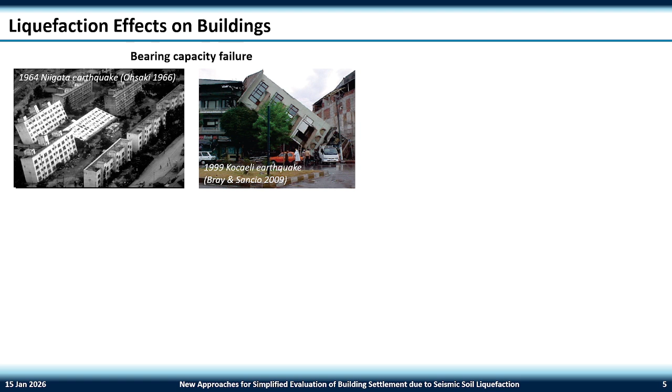So we'll look at case history observations, and liquefaction is a phenomenon that I'm sure many of you know causes soils to lose strength and stiffness, and so that can result in a wide range of effects on buildings. In the most extreme case, and probably the ones that make the headlines, are the bearing capacity failures, where we have the famous Kawagishi-cho apartment buildings from the Niigata earthquake on the left, and then some more examples that we've seen in Turkey, for example, in the Kocaeli earthquake.

For lightweight buildings, residential buildings as well, often this manifests in the form of tilts and settlements, and so Christchurch had several examples of buildings that had a few degrees of tilt and several tens of centimeters of settlement. In some cases, if we have buildings on piled foundations, you might often get cases where you have movements of the ground relative to the building. This is an example from the Kaikoura earthquake. Not really a case we'll look at today, but I thought I'd put it in here for completeness.

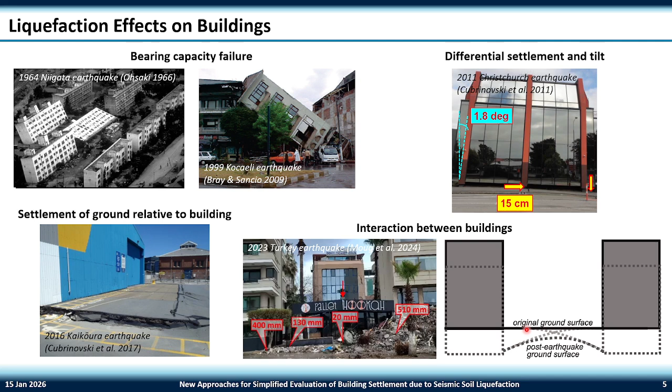And then more recently, from the 2023 earthquakes in Turkey, there have been some interesting studies looking at interaction effects between buildings. Here is an example of what looks like a hookah bar that sits between two larger and heavier buildings, and you can see the settlement of those two buildings is causing this kind of hogging ground motion, and that's controlling the response there as well. And so this is some interesting work that's also coming out of some of the recent earthquakes.

In terms of just focusing on bearing capacity, well, we know why that's happening. We know that liquefaction causes a decrease in stiffness and strength. If we visualize what's happening in the soils during liquefaction, it's illustrated with this diagram, where you can see the individual grain particles are actually not in contact with each other. And so there's not really much load transfer mechanism, which can lead to a loss of stability.

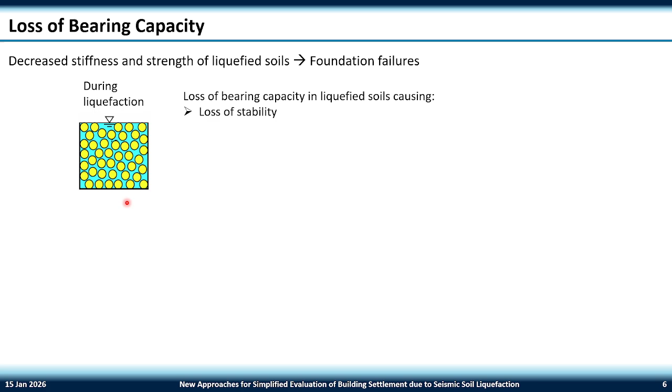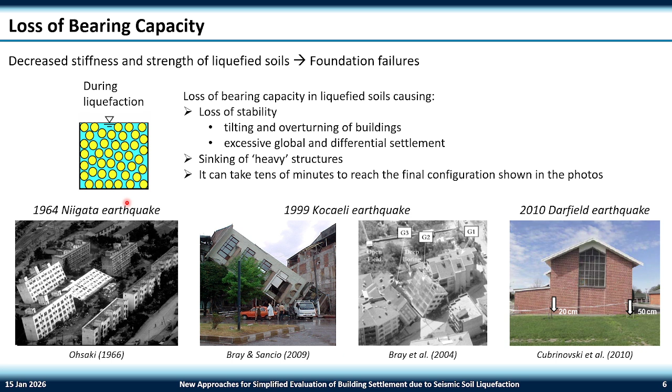For heavy structures, this comes in the form of tilting and overturning, and that's some of the pictures that we saw in the last slide. And then for lightweight structures, you might see it manifest in the form of excessive global and differential settlements. Just note here that these configurations in these images can take tens of minutes to reach. It's not going to happen straight away during the earthquake, but often manifests in this form a few minutes or sometimes even tens of minutes after the earthquake.

We also find that in cases where there's ejecta manifestation, these effects tend to be exacerbated. Ejecta manifestation is the case where liquefied soil has made its way up to the ground surface through cracks and fissures that are formed. So it's a hydraulic process of liquefied soil. Often we find that these are concentrated around the edges of buildings and footings. You can see some examples here of ejecta concentrated around these edges, and these are evidence of settlements due to soil loss as well.

You could imagine that once the soil has left a void in the ground, that void must be filled by the soil around it, and so that leads to additional mechanisms of settlement. And this is exacerbated for shallow liquefaction cases. This is an interesting consideration that you might want to include in addition to our traditional volumetric and shear-induced SSI effects as well.

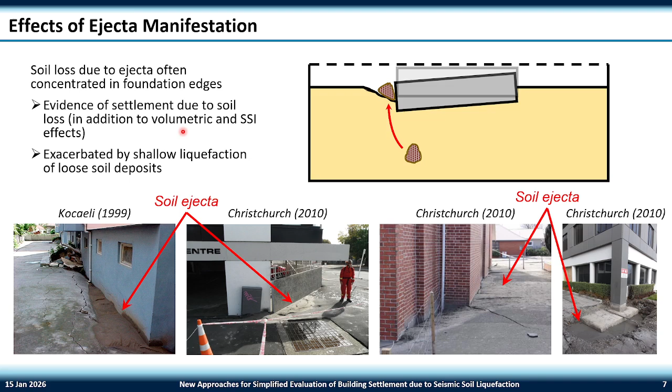Just to really drive home the point of shallow liquefaction, here's a case study of a building. This is the CTUC building from Christchurch. This was a building that's quite well studied, that liquefied. Below the building is a schematic of a cross-section, and you can see two CPTs there, one on the left-hand side of the building and the other on the right. They show profiles of the soil behavior type index, I sub C, plotting to the left of this line, and the corrected cone tip resistance, the QT, plotted to the right of that line. The shaded regions indicate soils that, according to existing simplified procedures, had liquefied during the earthquake.

And you can see on the right-hand side, that zone is really quite deep, right? We're seeing liquefaction occurring at about 10 meters or greater depth. But on the left-hand side, though the cumulative thickness of liquefied soil is equivalent, if we sum up those thicknesses, it's probably similar, it's much shallower, at about 2.5 meters depth. Shallow liquefaction, of course, tends to increase potential for ejecta, and in this case, we saw sand ejecta near the left-hand side of this cross-section here.

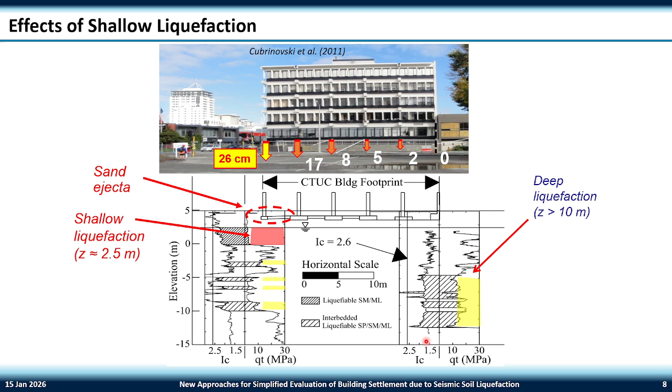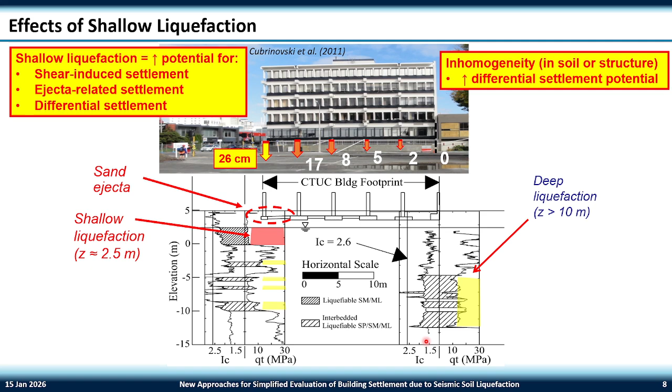And so this resulted in these differential movements that you're seeing here, right? You saw in the order of 25 to 26 centimeters of settlement on the left-hand side of that image versus much less on the right-hand side. The key takeaways here are that shallow liquefaction means increased potential for shear-induced settlement, for ejecta-related settlement, and differential settlement. And to drive home the point of differential settlement, non-uniformity in the soil or structure also tends to increase these differential settlement potentials.

This is a nice video to illustrate what I'm referring to with some of these features. This is an exaggerated demonstration from some of my colleagues back at the University of Canterbury, a shake table experiment that we do. You have a shake table at the bottom, and this is a box of sand loosely deposited, and the groundwater table is pretty much at the ground surface. It's slightly below the surface that you see, and we'll focus on the heavy structure on the right and the lightweight structure on the left.

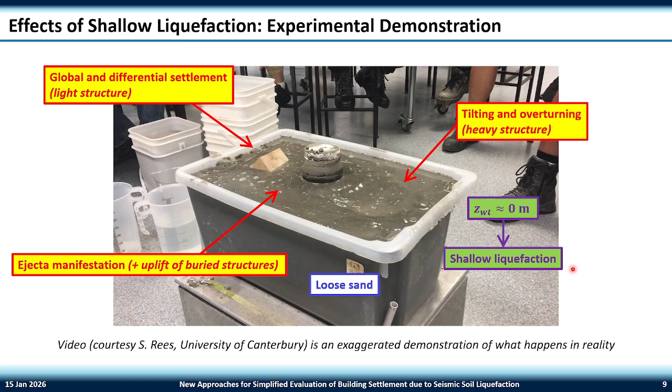Once we start shaking, we'll slowly increase those pore pressures. We're not seeing those effects straight away, but at some point you're going to get shallow liquefaction, and then a few seconds after that we're going to see the effects coming in the form of excessive tilting. You can see it's very, very exaggerated, and in lightweight structures, settlements. Of course, we're also seeing ejecta manifestation here, and that's another feature that tends to come out. Hopefully our buildings are not doing this level of damage, but it does give you an exaggerated demonstration of what's actually going on.

Okay, so that was a quick overview of some interesting case histories, but the idea now is to start collating those and understanding what are the key effects that play the most governing role in some of the responses we're seeing. And this is a nice summary of perhaps some of the features that play the most important role. This is not everything, it's not encompassing everything, but it tends to be the ones that govern the most.

And in terms of soil properties, we find that the thickness of liquefied soil layers, the depth of the liquefied soil layers, and the properties of the liquefied soil layers tend to play the most important role. There are other features, but this tends to be a key feature itself. We've already talked about

We've already talked about the importance of the depth and thickness, but you could imagine the properties as well play a role. If you have a loose soil that's, let's say, contractive, then it might behave much differently to a dense soil. In terms of building properties, we're finding that the width and the bearing pressure tend to play a governing role. And then, of course, looking at rigidity of foundation, ground motion characteristics, uniformity in the soil properties, they all tend to play a governing role.

And so our objective, when we're looking at preliminary design objectives, is getting a good feel for what these are doing for our particular site of interest. Okay, so which of these are playing the most governing role for our settlement calculations when we're looking at forward design?

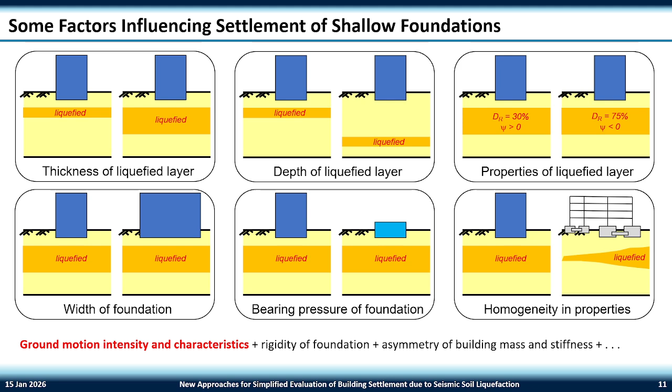In Vancouver, there's a nice task force. This was put together back in 2007. I'm a big proponent of this task force. I think it's got some excellent work in there. And it was a nice design guideline. My understanding is that it was put together at the time to ensure that the practice in British Columbia was up to speed and doing the same or similar things across the board. And so it compiled some of the recommendations of the profession at the time. And they have a nice section here on post-liquefaction settlement.

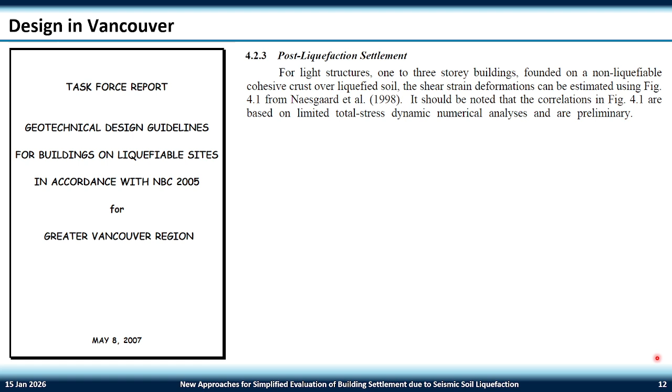Okay? And they say here for light structures, 1 to 3 story buildings founded on non-liquefiable cohesive crust over liquefied soil. So we want to think of it in terms of this 2-layer model. I'm going to put this up here because we're going to come back to this 2-layer model, and we're going to refer to this quite a lot during the later half of the talk. Okay? So we're thinking in the form of a foundation on some non-liquefied crust over liquefied soil.

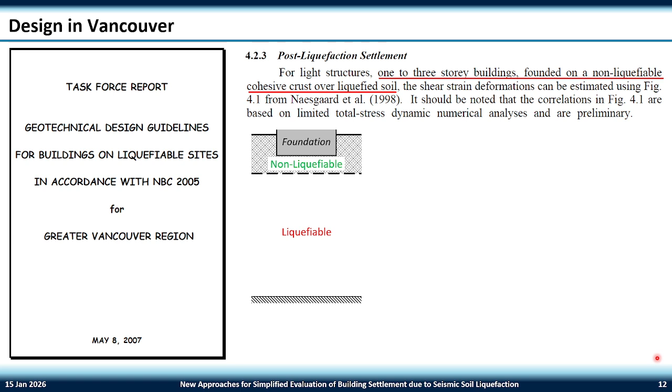And we want to use this chart that was developed, I believe from some of Ernie's work back then. And it was used for the purpose of preliminary design. Okay, on the y-axis is the post-liquefaction shear-induced settlement, and on the x-axis is the bearing capacity factor of safety. Naturally, as the factor of safety gets lower, we expect the settlements to be larger.

Okay. So now, having prefaced you with 10 minutes or so of the key features that govern liquefaction, some key questions would be, can we capture those effects from the previous slide in this factor of safety calculation? Are we able to capture the effects of the depth, the thickness, the properties of the liquefied soil? Are we capturing the effects of the foundation properties, etc.? And if we are, how easily can we assess their sensitivity? Remember, we're doing preliminary design. This is not the stage of detailed design. And so we want to understand those features pretty quickly.

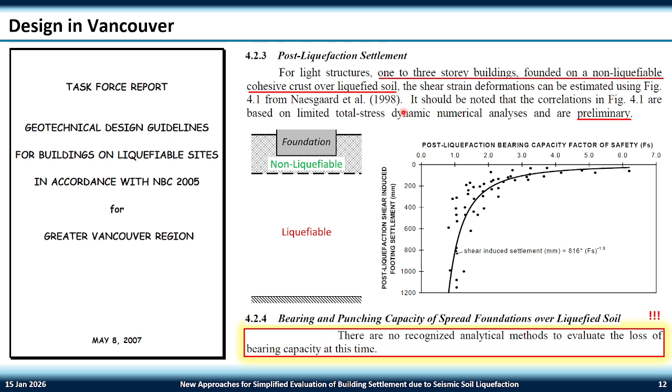We keep reading on in the task force report, and the very next section says that there are no recognized analytical methods to evaluate bearing capacity at the time. And so we have this nice chart here, but the issue does arise in terms of having a robust method to calculate factor of safety. And so this leads to a natural challenge in terms of, well, how would we calculate settlement in this case? And so this brings us to the second point.

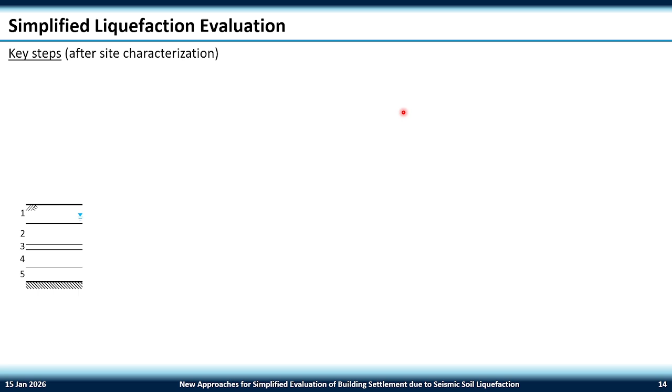Okay, so we've talked about background on some case histories, and looked at some key analysis and design considerations. Let's have a look at what the current state of practice is in terms of evaluating settlement. This is my one slide overview on the simplified procedure, but it does help paint the picture. The key steps after site characterization. Following site characterization, you might look at some susceptibility.

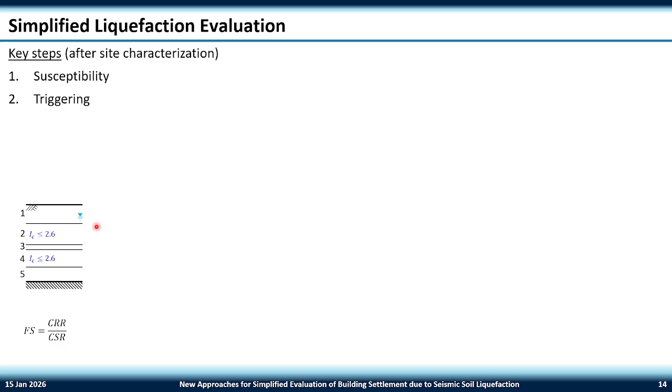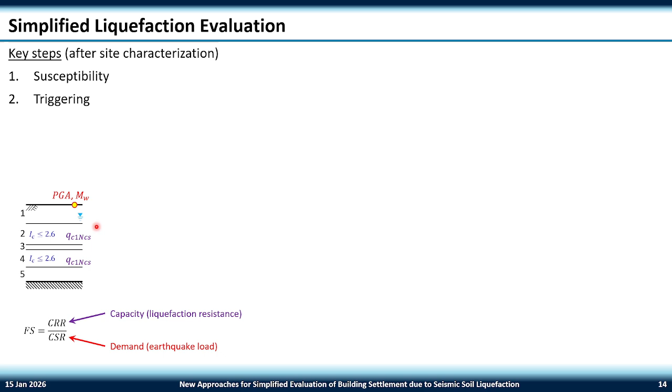So for this schematic soil profile with 5 layers and a groundwater table, we might use, for example, CPT data to suggest layers 2 and 4 are liquefiable based on the soil behavior type index, just as a proxy. We would probably then follow that with a triggering procedure, and often we do a stress-based approach with factor of safety. Our capacity is often our QC1NCS, our corrected clean sand equivalent cone tip resistance. And then our demand and our factor of safety is often a measure by PGA and magnitude. Those tend to be the earthquake inputs that we use.

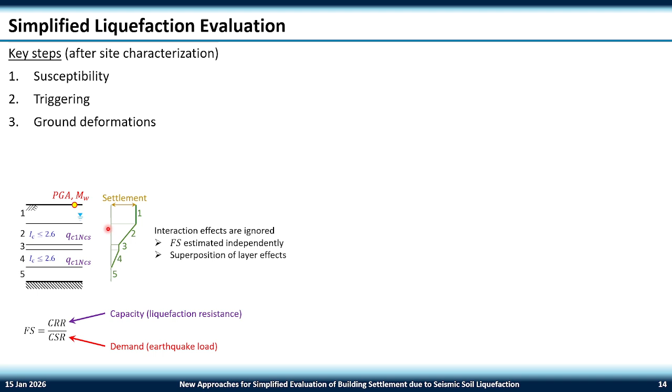Then we look at ground settlements, and ground settlements often tend to be the superposition of different layers. So in our example here, layers 2 and 4, for example, could be contributing to the total settlement at the ground. And it's important to note that these interaction effects are ignored. So these calculations are performed independently for each layer, and they are superimposed to give you a total settlement. And then we look at effects on structures following that assessment, okay? And so we might want to take it a step further and look at global settlements and differential settlements. And this tends to be the flow of calculations.

And there's a lot of details in each of these steps, and we can start breaking down some of those details. But I want to give the key takeaway, and this is the essence of the simplified procedure: it really comes down to 3 key features. You can group them into 3 categories. One is the site characteristics, right? You're looking at the profile characteristics, the material behavior within the profile. And so that boils down to these layers.

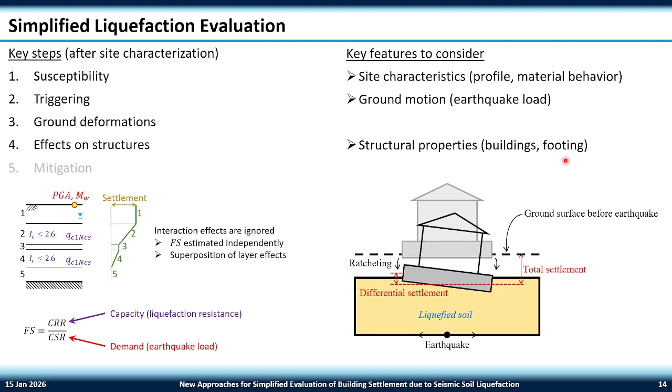We're using these CPT values as a proxy for expected behavior during cyclic loading. Second, the ground motion characteristics, or the earthquake load, which we often tend to capture with PGA and magnitude, which tends to do a pretty decent job for triggering, although there are other better measures out there. And then structural properties in terms of the building properties, the footing as well. Okay, so the width of the footing, the bearing pressure, etc. So these are the 3 key features that we're essentially trying to capture in these simplified procedures. So rather than going into the weeds, that's the overarching three steps.

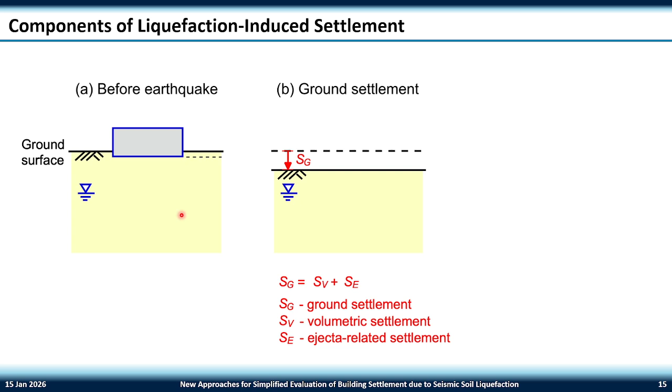Now for building settlements, what does that mean in terms of our calculation flow? So often we would maybe start with the schematic here. This is the case before the earthquake. You might have some sort of footing into the ground, and below that is some liquefiable soil. We would start with ground settlement, and this is essentially starting with saying, what is the settlement that we expect to occur at the site, independent of the structure being there. Okay, so we're essentially doing a free field level ground settlement, and that often has 2 components, a volumetric component and an ejecta-related component. Right?

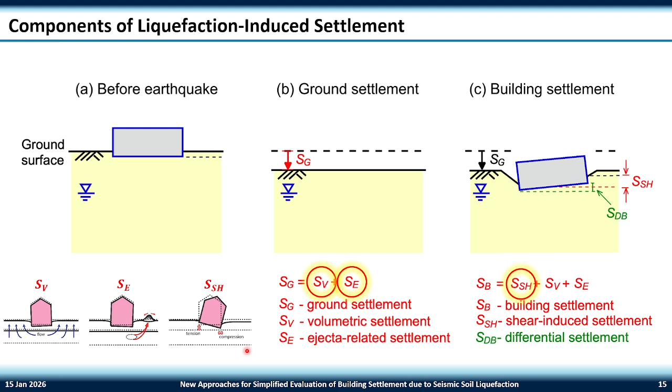The volumetric we might be familiar with, that's the dissipation of excess pore pressures. The ejecta component is due to soil loss from ejecta. Apologies if that figure is a bit small, but it's due to soil loss from ejecta. And then we add, so it's an additive component, an additional component to give us the building settlement. And this is the shear-induced component. Okay? And this is the current flow of calculations that we often do in practice. Okay, we start with the ground settlement, then we have an additive component for the building settlement. Well, let's look at the ground settlement.

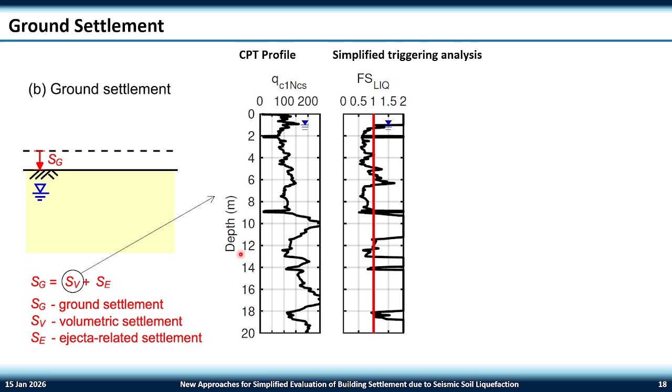So we'll start with the simplified procedure, and we say, okay, SV. So our ground settlement, we might start with our CPT profile. So again, there's that parameter that we looked at before, right? The clean sand equivalent cone tip resistance. As a function of depth, we would go through all of our calculations, simplified analysis, and then use these pretty well-established charts to look at strains or volumetric reconsolidation strains. And so Zhang et al. is the method that I'll be referring to. It's largely based on the work of the late Professor Ishihara.

The reason I'm showing the details here is it's important to highlight that I'm performing the calculations at each depth and integrating them without any consideration of the depth of liquefaction, right? So these factors of safety, whether they're low at the shallow end or at the deeper end, we would still get the same volumetric settlement because it's not accounting for the depth of liquefaction.

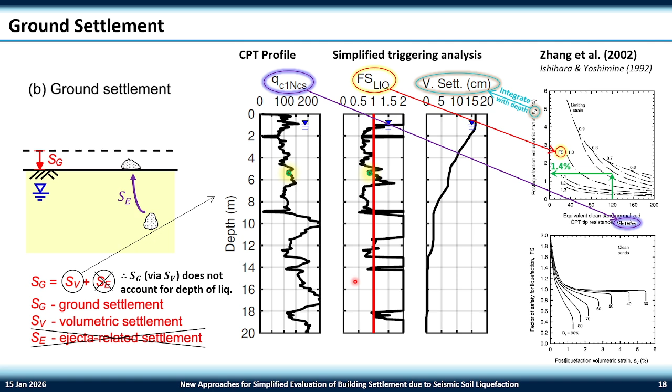Well, what about ejecta-related settlement? That would be the next component, and often we ignore it. There's no well-established method out there at the moment, and so really we're using ground volumetric settlement as a proxy for the ground settlement. But it's important to remember that it's not accounting for the depth of liquefaction, which we know is a key feature for building settlement. Okay? So that's the ground settlement.

What about the building settlement? So let's go back here and start diving into the building settlement. Again, this is the shear-induced component, so we have the volumetric. I put a question mark next to the ejecta because there are no well-established methods out there at the moment. And now we look at the shear-induced component. We'll be focusing on the Bray and Macedo method. This is from a paper that was published by them as part of the Ishihara lecture series back in 2017.

Their method essentially follows like this. Again, start from the simplified procedure. They start with the same framework. But then they have these two properties that are essentially a combination of soil properties and earthquake properties. Remember those three parameters that play a big role: soil properties, ground motion characteristics, and foundation properties. So they have these two parameters, HL being the cumulative thickness of liquefied soil, so essentially you're summing up all the thickness of soil where factor of safety is less than 1. And then they have this LBS parameter. It's essentially an integration of strain with a depth weighting function. So this is directly one where they're explicitly considering the depth of liquefaction.

You can see the gradient of this line is much steeper at the shallow depth versus the deeper values, reflecting the fact it's a greater weight. So they have these sets of inputs. They have the foundation properties as bearing pressure and width, and then they have additional earthquake load demand parameters, and in their case they use the cumulative absolute velocity and the spectral acceleration. That already rings alarm bells for many people, because now you're inputting some time history parameters as part of your simplified procedures. So you already need PGA and magnitude to perform your simplified triggering analyses, but now you need 2 additional earthquake demand parameters, so 4 in total, to perform the full calculation flow. And from a simplified analysis perspective, that can pose some challenges.

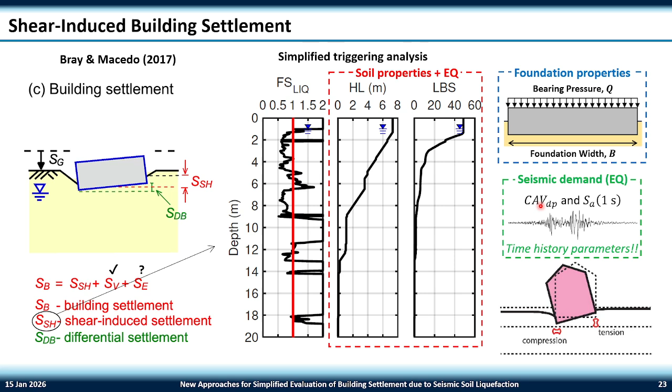So let's say you have a site. The first thing you might do is go to NBC 2020, check the hazard for the site, and go, yep, these are the return periods that I'm interested in: a serviceability limit state, so maybe a 475 year return period, and then maybe a design ground motion at a 2475 year return period, and that might be associated with a given shaking intensity. And so you might extract, let's say, a PGA or a PGA and magnitude pair from your seismic hazard.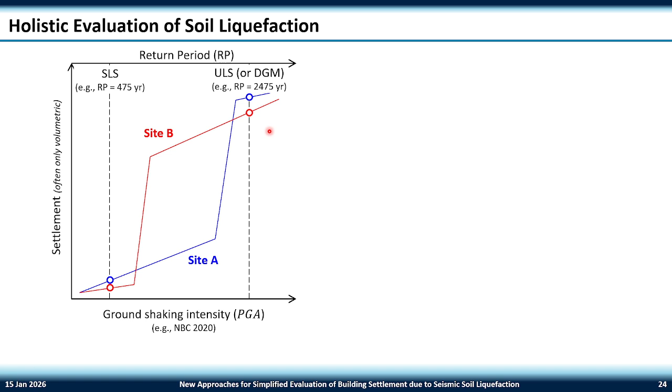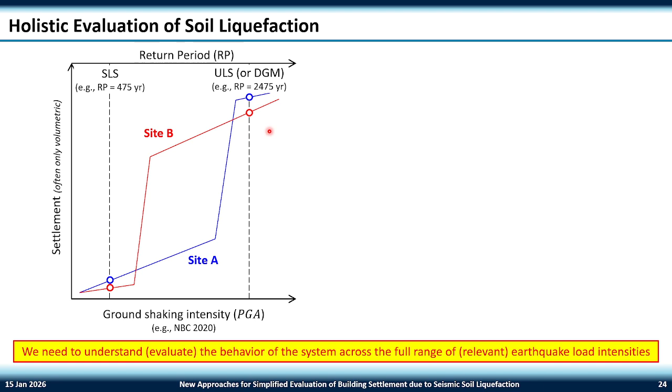When in reality, we should be considering the response curve over the entire spectrum. Right? We're missing the key picture here, and if you had the response curve as a whole, it's quite obvious which site is performing better. Site A is significantly better than site B. So you imagine the power of performing calculations across the entire load intensity and then bringing in the hazard afterwards. It's important to understand and evaluate the behavior of the system across the full range of relevant earthquake load intensities. In addition to that, we want to account for uncertainties. So each of those lines should have at least some error bands that realistically reflect the uncertainties in the response. And so you might have some plus or minus 1 standard deviation lines shown in dashed here.

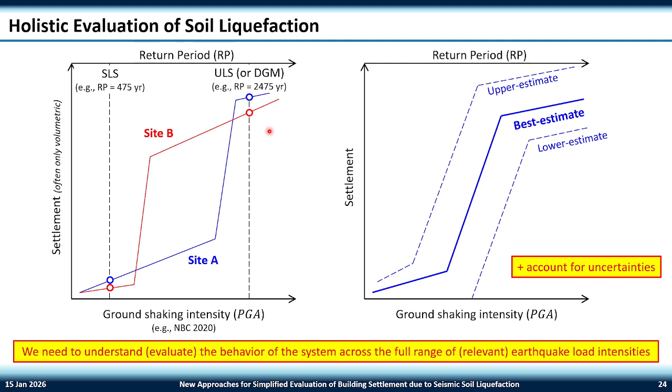Okay, so that was a quite dense overview, but it does give us some context before we start looking at the procedure that I will propose from now. So to recap, current practice. We have volumetric settlement, our SV component. It's a CPT-based method that we're going to be focusing on, and it incorporates results from the simplified triggering analyses. And our seismic demand is a combination of PGA and magnitude. From now on, I'm going to use PGA 7.5 to reflect those 2 parameters.

So we're going to combine those 2 to give a PGA for an equivalent magnitude 7.5 earthquake. So it's a correction that you can do. But essentially, whenever you see PGA 7.5, think a combined effect of PGA and magnitude. Remember, it often is used as a proxy for ground settlement, and sometimes even building settlement, which is a problem because we know it doesn't consider depth of liquefaction.

Ejecta-related settlements, well, there's no established method, and so it's often ignored. And shear-induced settlements, which, current state of practice, we use a CPT-based procedure following a triggering assessment, but requires some time history parameters. Okay, so we need to extract about 4 different seismic demand parameters for a given limit state.

In addition to that, it's difficult to ascertain the effects of key input parameters on settlements. So if you recall the calculation flow that I talked about, if I were then to ask you, hey, actually I have some uncertainty in my ground profile, actually my liquefiable soil is now slightly deeper, what's the effect on calculations? Well, you have to go through that flow again. You're doubling your work. So each of those sensitivity checks that you might want to do, it's not very obvious from the very outright start what the effects are.

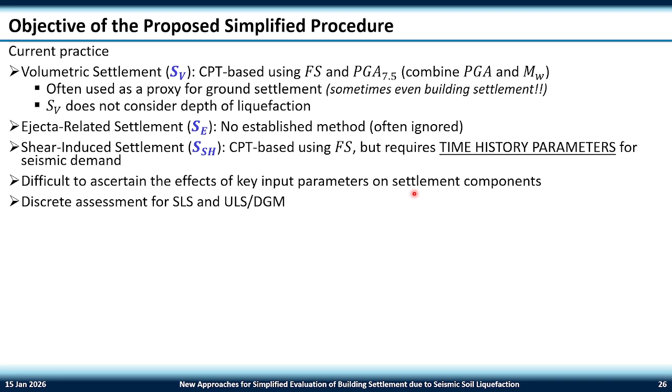And then lastly, I touched on the fact that we're often doing a discrete assessment at given limit states, right? For example, a serviceability and then an ultimate limit state, rather than considering the response over the full spectrum. So what I'll cover from now is what we refer to as the Cubrinovski-Dhakal method. It's summarized in 3 recent publications, and they are given at the end of this talk. I believe it's recorded, so you're welcome to go and check those papers, and I encourage you to do so. And I reiterate that this is a method developed for preliminary design only.

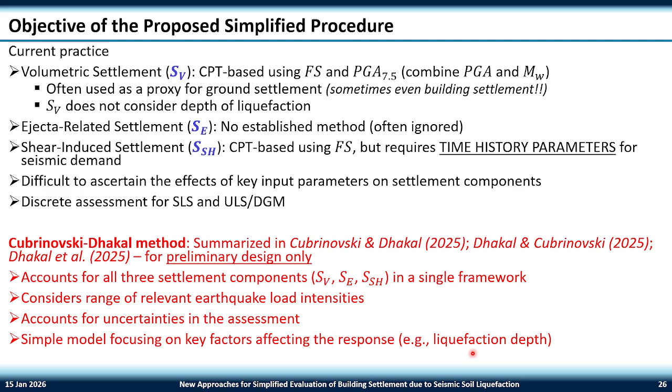Okay? And the key features are that, 1, it accounts for all 3 settlement components within a single framework. So we're not chopping and changing between different methods. It accounts for the range of relevant earthquake load intensities. So our outputs are given as response measures versus PGA, rather than at given limit states. It accounts for uncertainties in the assessments. And it's a simple model focusing on key factors affecting the response. It's more important as engineers for us to get a feel for what's playing a governing role than to hone in on the right number to the right decimal place. And so that's kind of the objective behind this method here.

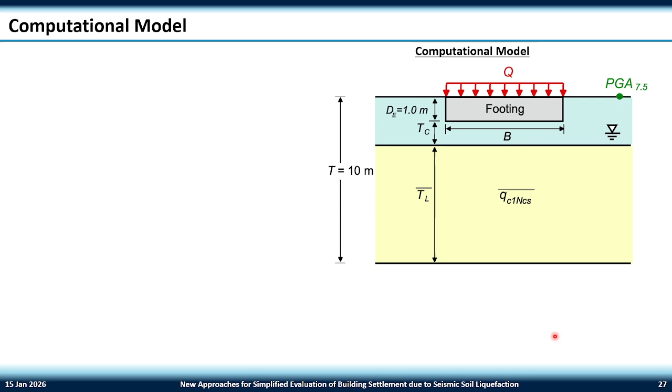The key ingredient behind the method is this computational model. Remember in that Vancouver task force report that I suggested, they were already introducing the ingredients of this, where they were talking about a foundation on some non-liquefied crust over some liquefied soil. Well, we're going to follow that concept here. And the idea is to construct this computational model and check the key relationships for this type of model. And so we take a CPT data and we convert it to the simplified 2-layer model.

So our CPT data, this is just one example, showing you a profile of our corrected cone tip resistance and our I sub C. We have our groundwater at about 1 meter, and you can see below 1 meter depth, it looks like some of the soil has I sub C of about above 2.6. So you might say that the liquefiable soil might be started around 2 or 1.8 meters. And so that will give us our crust and essentially define this top layer of our computational model, which is this crust thickness. Okay? We're going to start with assuming just a footing embedment of 1 meter, so just slightly embedded into the soil. And so this parameter TC is essentially the crust below the embedment of the foundation. Okay? And we can define that based on the CPT data.

Part of the method is also to look at the QC1 NCS values of the entire soil, and we've developed equations to compute a single weighted average QC1 NCS value that represents the liquefiable layer. That essentially gives us our input for our soil properties, which I refer to as QC1 NCS bar, or the average value across that depth. It's an algorithm that accounts for the thickness and the depth combined, because we know that's important. So that's inherently a part of the procedure.

And so with those 2 inputs, the thickness of our crust and our QC1 NCS, we define the soil properties of our 2-layer model. Notice the entire model is only 10 meters thick. We're limiting it at 10 meters because numerical analyses agreed with case histories that liquefaction below 10 meters didn't affect the shear-induced component or the building settlement component significantly, in the order of less than 5%, roughly. So we said we're okay with removing 5% of that additional settlement and limiting our case to the top 10 meters.

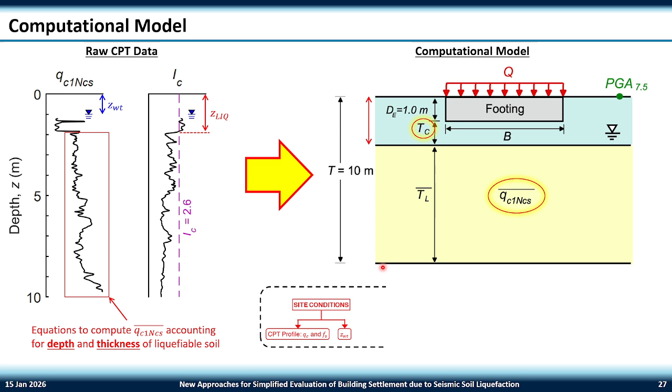Right, so we have our 2 properties that define our soil properties. The second important feature is foundation properties. In this case, we're keeping it as the foundation width and the bearing pressure. And then our earthquake load, which is our PGA and magnitude. So remember those three key ingredients for the simplified procedure, we're still retaining those features. In this case, we're going to use PGA 7.5, but remember it's a combined effect of PGA and magnitude.

So with these key ingredients for our method, we're going to start developing relationships for the three components of settlement. We'll start with the volumetric settlement. I'm replotting the computational model in a slightly shrunken form to give me some space, but it's the exact same computational model that I looked at before. The goal here is to extract the key trends and relationships within Zhang et al. We're going to take their method and extract the key relationships embedded within the procedure. How do we do that? We did that by running a wide range of sensitivity studies.

We said, let's vary our QC1 NCS value from 30 to 150, so from extremely loose to dense liquefiable soil. Let's vary our crust thickness from 0 to 5 meters, and then vary our PGA from 0 to 0.7 g. And we perform calculations at every combination of these sensitivities, so cross combinations as well. We go through the procedure. For each case, we calculate a factor of safety, and then go through the full Zhang et al. procedure to calculate strain, the same chart that you saw earlier, and then get volumetric settlement. We want to see what relationships we can extract from that.

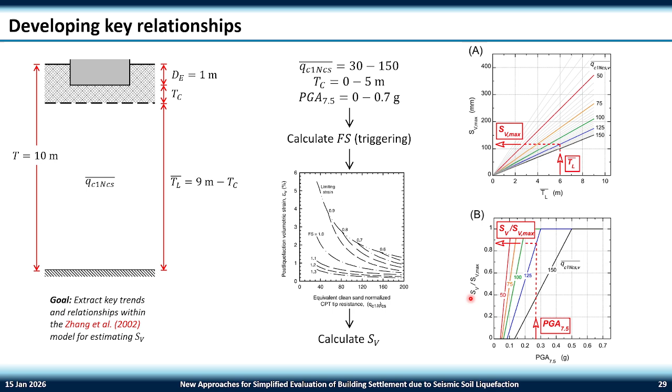The second chart that came out shows how the volumetric settlement goes from 0 to maximum as the seismic demand increases. Notice in the top chart, I'm not bringing in the seismic demand at all. In the bottom, the x-axis is PGA 7.5. So as I increase the earthquake load intensity, how does my settlement go from 0 to the ratio of 1, which is SV over SV max, the maximum possible settlement. I'm going to blow this up here. Here's your chart on the left showing thickness of liquefied soil as a function of SV max, and then that second chart there.

So let's take an example. Let's say you have a crust below the foundation, a 3 meter crust below the footings. And let's say from our CPT data and those equations from the paper, you calculate a single depth-weighted QC1 NCS average value of 125. And our seismic demand is 0.25. So you would go into the first line, our thickness of liquefied soil is 6 meters. You read off the line, this blue line is for a QC1 NCS of 125, and you'd get 120.

So before you even bring in the seismic demand, that's the maximum possible settlement for this site, given these properties. Then we say, actually, our PGA is 0.25. What does that mean in terms of our lines? And you can see here, you could read off the chart and say, actually, you're at 75% of the maximum. Okay, and so you could combine those two together and say, yeah, you'd get 90 millimeters of

settlement. Okay, and the paper has some recommendations on some uncertainty bounds as well, and I've just included that here to illustrate that as well. Okay, so that's the volumetric component. We're just extracting the key relationships.

But you can already see the power of having these relationships in front of you, because if I then ask you, oh, actually, I have some uncertainty, my liquefiable layer thickness is actually only 5 meters. Well, I can quickly see the effects of that on my settlement calculation. Or if I have some uncertainties in my QC1NCS, I have some lab data that suggests there might be something different, okay, and I can see those effects playing a role in these two charts as well. So you're visually quickly seeing those effects without too much additional effort.

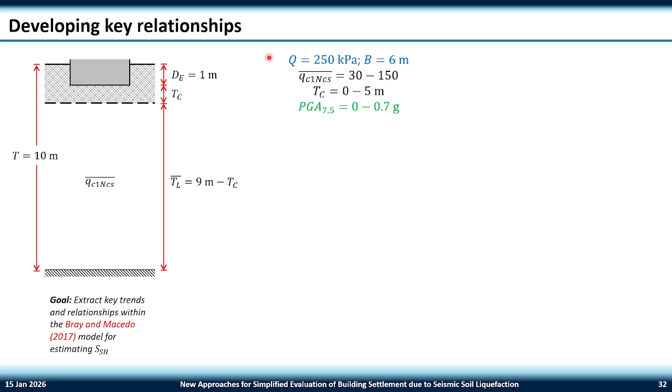But this is the worst case scenario from their paper, and so we're going to take that with a very, very heavy load of 250 kPa and a width of 6 meters. I know it's unrealistic, but bear with me. We're going to go through the calculations, calculate the soil properties, look at their shear-induced settlement method, and calculate the shear-induced building settlement. And again, see what relationships we can extract from that.

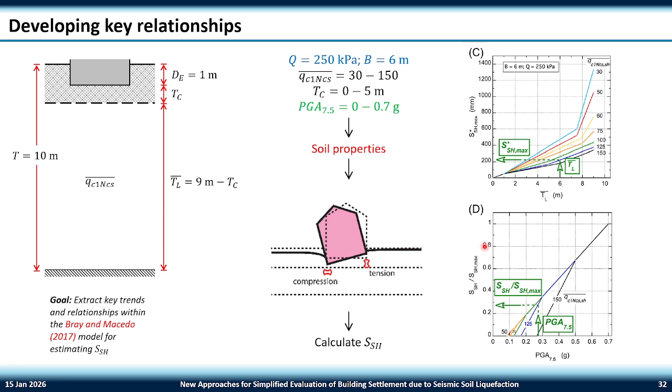Again, we have the first relationships that we extract. You'll notice it's in a very similar format. Thickness of liquefiable soil on the x-axis, maximum possible settlement on the y-axis. And you can see as your QC1NCS decreases, so as you're getting looser soil, you're going to get larger possible settlements. Then your second chart, again on the x-axis is PGA75, and on the y-axis is how that ratio goes from 0 to its maximum.

Okay, so I'm blowing it up again. It's the same curves. I'm just going to explode it slightly and go through that example again. So we have the exact same soil properties. So we have a 3-meter crust or a 6-meter liquefiable soil, QC1NCS of 125 and a PGA 0.25. Again, you read off this chart, you might get something like 210 millimeters of maximum settlement. Scale that by 21% according to the second chart. Combine them, you get 45 millimeters of shear-induced settlement with some uncertainty bounds. Okay, so that's the chart.

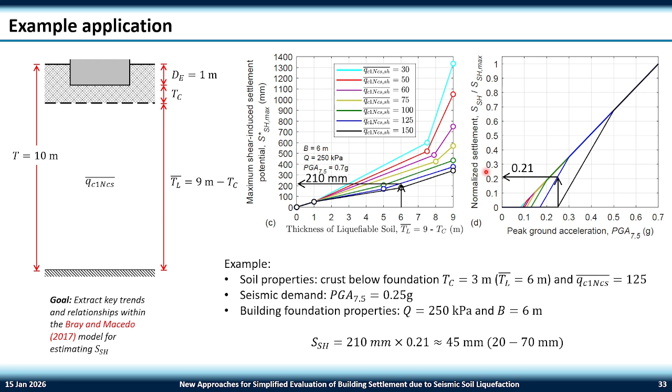Now, naturally, the question is, well, what if my building properties are not these specific values? And so there are correction factors that we, again, extracted from the relationships of the Bray and Macedo method. So, for example, if we had instead 100 kPa load and a 15-meter wide footing, we use these two correction factors, the top one being a correction factor for the bearing pressure. So you can see it goes from 0 all the way to 1 at 250 kPa. And then the second chart being the correction factor for the width, going from 1 for 6-meter width all the way down to about 0.7. And so for our example of 100 kPa, you would get a correction factor of 0.72 and 0.87, for example.

And so if you multiply that by that 45 from the previous slide, you might get actually 30 millimeters of settlement. Okay. Again, you can see the beauty of these charts because I can then say, hey, if I want to actually save on settlement, what if I make my foundation really, really wide? Well, you can see the effect of that with this chart here very, very quickly. Right? So you can start doing sensitivity studies just visually or back of the envelope calculations. That's the idea of the preliminary design approach.

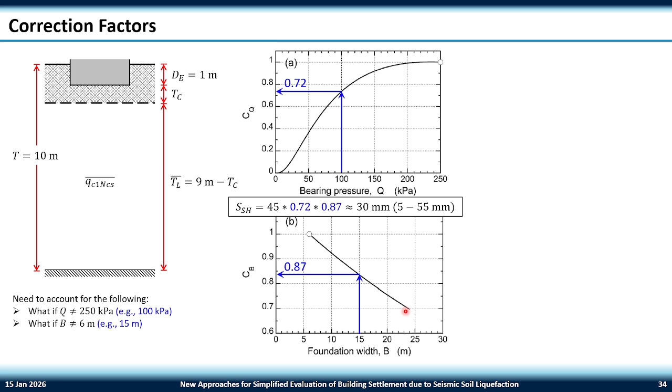There are also correction factors embedded in the procedure for non-liquefiable soils embedded within the material. So naturally, so far we've considered all of this soil to be liquefiable, but that's not always going to be the case. You're going to have some nature of this type where you're going to have liquefiable soil, non-liquefiable soil, liquefiable soil, and embedded. And there are correction factors.

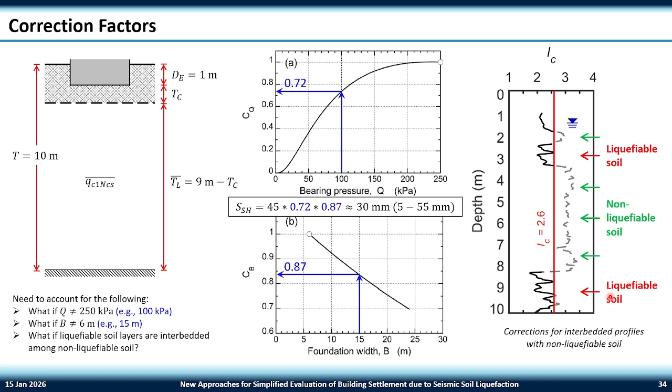Again, one-line equations that you just add as correction factors. So that's a lot of simplification, right? We're taking the existing Zhang procedure, the existing Bray and Macedo procedures, and we're simplifying it to this two-layer computational model. How well does it perform? How does it compare to the existing methods?

And so this is a comparison of 1,386 analyses. So these are 126 sites. We decided to take a wide range of sites from around the world. About a third to a half of them are from Christchurch. The rest are global case histories. And they contain a range of ground motion types. Okay, we have loose soil over dense soil over loose soil. We have vertically continuous, interbedded, all types of deposit types.

And you can see on the left a comparison of our method. This is the shear-induced component versus the Bray and Macedo. And you can see the majority of those case history comparisons fall within plus or minus 25 mils. On the right is a comparison of the Zhang method for the volumetric component. And while it's slightly more scattered, we're still seeing about 93% of these analyses fall within 25 mils.

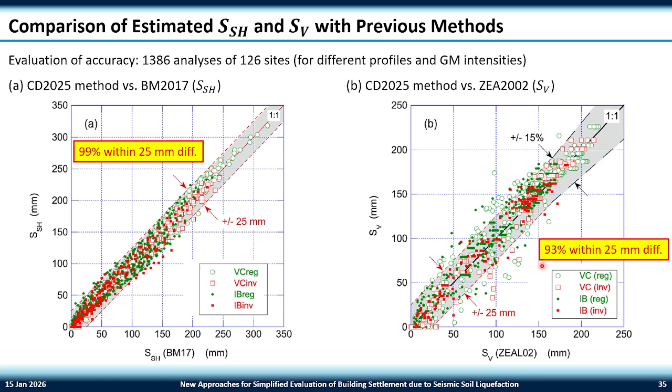If you're at a preliminary design stage, if you're willing to compromise on 25 mils of accuracy with those existing procedures for the benefit of having those quick sensitivity studies and checks, that's what this method is offering. Okay, so we're seeing those benefits at the cost of some misestimation compared to the traditional state of practice. Okay. Hopefully so far so good.

I think we've tackled the two easy components, volumetric and shear. The reason they were easy is because we had existing methods to base them off, right? All we did was extract the key relationships, have some algorithms to develop a computational model, and define them very well. That's all we've done. But for the ejecta-related, we run into a problem. There are no existing methods to do that with. And so we said, okay, well, how do we tackle this?

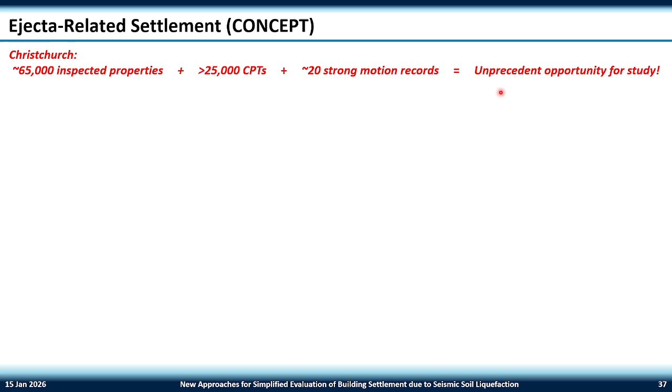And the concept really came from a myriad of research following the Christchurch earthquakes. Following the decade or 2 decades after the Christchurch earthquake, there were several tens of thousands of properties inspected, over 25,000 CPTs performed throughout just the one city, about 20 strong motion station records for multiple earthquakes, not just one earthquake, but multiple earthquakes. And so this gave us an unprecedented opportunity for study, right? It was the most high quality or densely arrayed set of liquefaction manifestation data that we had. And so we said, okay, well, let's start by the set of data that we have the most confidence in, and that's ejecta area, right?

We can easily, or at least very quickly, based on satellite and ground photos, map the outline of ejecta following earthquakes. And so here's an example of a site where we look at a 10-meter radius, a 20-meter radius, and then a 50-meter radius area around that location, and start mapping how much of that area was covered by ejecta. And so you can see these yellow lines here indicating ejecta coverage, the pink lines indicating slightly thicker ejecta coverage, etc. And we corroborated that with ground photographs.

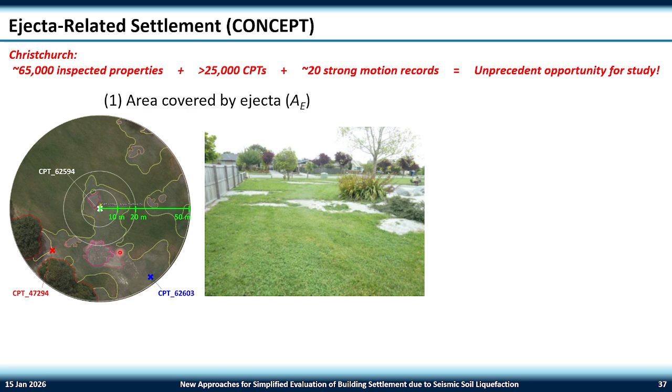Then to add to that set of data, there was also a decent amount of volumetric ejecta, volume of ejecta settlement estimates as well. So we had measurements of thicknesses of ejecta, shapes of ejecta manifestation in triangular, prism, circular, etc. And so that gave us a measure of the volume of ejecta. And so if we just assume that the volume of ejecta is uniformly distributed over that site, given whether that's a small or large area, we considered 3 different definitions, we can say that ejecta-related settlement is roughly the volume divided by the area. That gives us a proxy for the ejecta-related settlement.

And this was largely based on a series of work done by Zorana Mijic, who I believe is now at the University of Delaware, but at the time was a PhD student of John Bray in Berkeley. And she spent her PhD basically collating this database. And it was a very, very high-quality database of these types of work. So they had about 200 or 250 cases where they had good data like this.

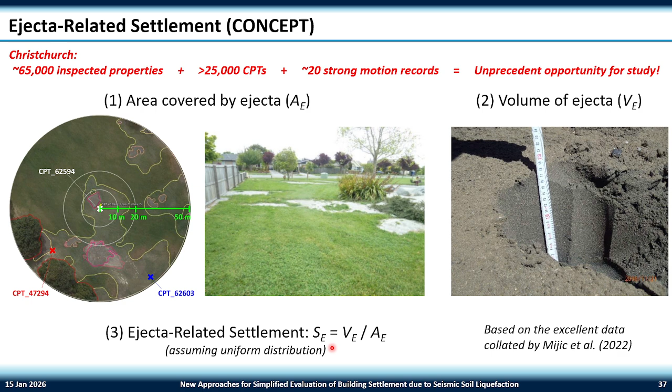When we studied their database, we found that actually one key characteristic stood out among the rest, and that was the soil deposit type. We found that actually, depending on the soil deposit characteristics, the response varied quite a lot. On the left, I'm showing you a vertically continuous deposit type, mostly comprised of liquefiable soil. So you can see here, this is a profile of Qc1n-cs, but this red and green soil profile here is a simplified profile indicating soils that are liquefiable and non-liquefiable. So the red is indicating liquefiable material. And we found that actually these types of materials, while it might not necessarily all liquefy during an earthquake, they all develop some excess pore pressures.

And so actually these entire deposits tend to connect hydraulically and contribute to ejecta manifestation. So you have an increase in pore pressure throughout the depth of the profile, which contributes to the overall profile response, leading to large ejecta manifestation patterns.

On the other hand, if we look at the right-hand side, these are interbedded deposit types, the green indicating non-liquefiable soil interbedded with these red zones, which are liquefiable soils. And while we find that the QC1N-CS values are pretty similar or even lower, you can see a value of 86 in the critical layer here versus 91. And so while we're getting perhaps even looser material, the liquefaction is isolated in different layers, and so they're not connecting hydraulically, and so there are morphological features that limit ejecta manifestation.

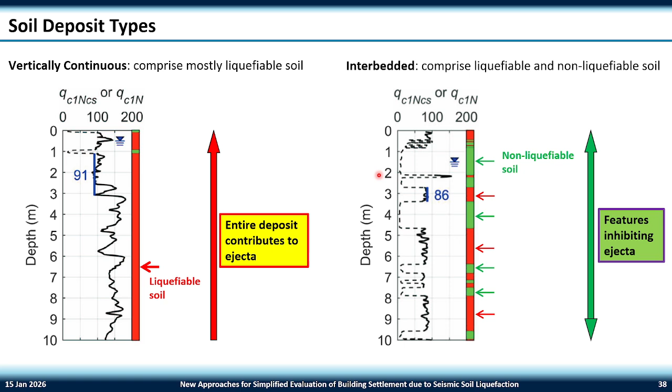To illustrate and drive this point home, this is a summary of the data plotted in 2 different formats. Before we look at the graph, I'm plotting 24 of the highest quality case histories from Christchurch. So we trimmed all of that data down to the very best data set that we could get. So we're looking at 24 benchmark case histories, supplemented by just over 100 global case histories. And these are largely taken from Boulanger and Idriss's triggering procedure, supplemented with some more cases from the Next Generation Liquefaction database.

And on both plots, I'm plotting on the x-axis PGA 7.5, and on the y-axis, the ejecta area coverage. The left-hand side is showing you a plot of vertically continuous deposits with critical layer QC1N-CS values less than 100, and on the right, same critical layer properties, but interbedded deposit types. So we're not changing the properties of the liquefied soil. They're both loose material. One is vertically continuous, one is interbedded.

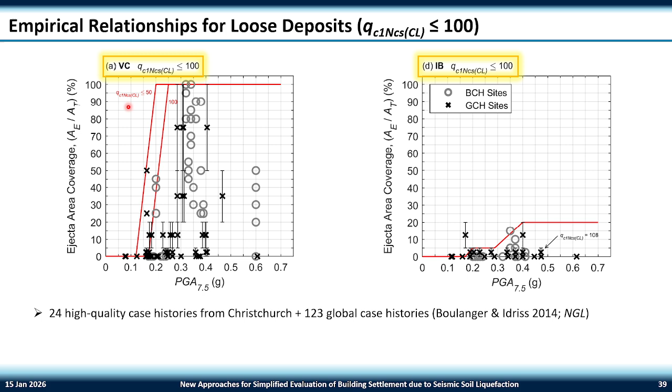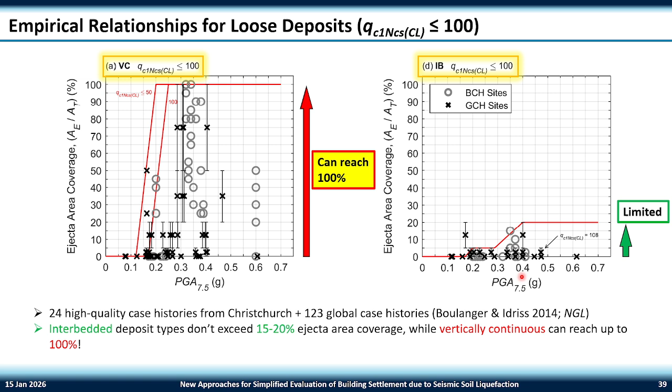And on the y-axis, you can see the ejecta area coverage can go as large as 100% for these vertically continuous sites, whereas they're very limited in the interbedded sites, right? And in fact, we found that none of the case histories even exceeded 15 to 20% ejecta area coverage. And so that tends to be a key governing role that is an additional consideration in our ejecta-related settlement.

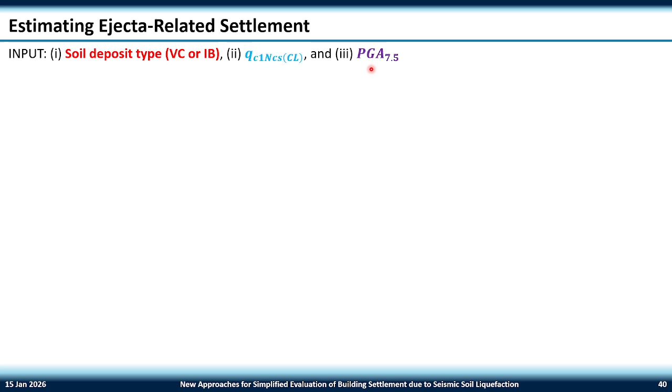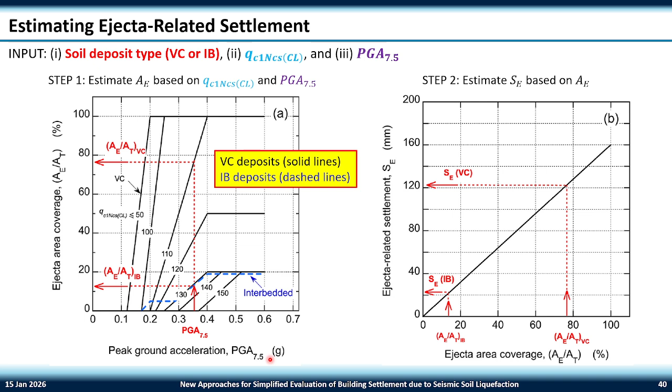The left-hand plot is not very obvious, but I'm going to replot it in a different way. Okay, so we have PGA 7.5 and QC1N-CS. I'm going to plot them as PGA 7.5 versus QC1N-CS. And so here I'm plotting it in the traditional triggering format. It's the same relationships, but just plotted in a different way. Perhaps we're more familiar with this format of the plot. And so I'll show it like this as well.

The red line is showing you the triggering relationships of Boulanger and Idriss. I'm converting their CSR values back to PGA 7.5. Their data is open source. It's a simple one-line calculation, but you're converting their CSR to a PGA 7.5, and we're comparing our method to their triggering procedure.

And you can see the beauty of this is that we're going to move beyond binary yes-no predictions. Now we're seeing that the further away from this triggering line you get, the more potential for ejecta manifestation. Right? So if you're at the top end of this chart here, we're really at the area where there's extreme potential for extreme ejecta manifestation, which is defined as 50 to 100% ejecta area coverage. Okay, and just to recap, remember the three key features: soil deposit type, density of liquefiable soil, seismic demand.

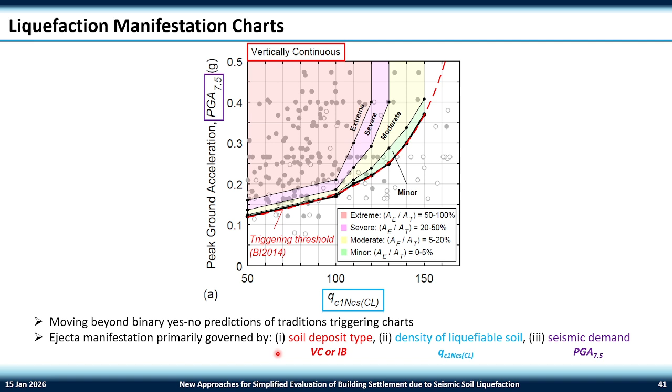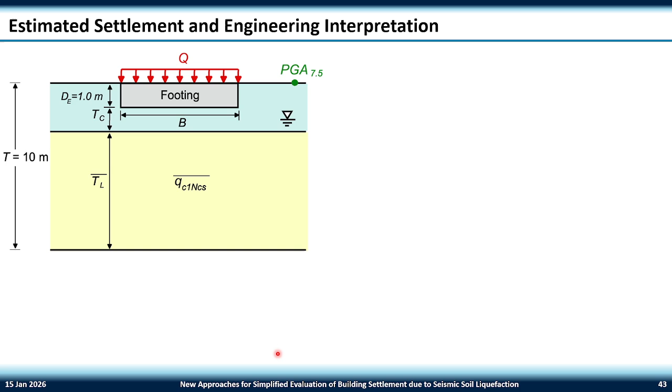Okay, so this is maybe a chart that we're more familiar with. Okay, so to round it off, let's recap and look at the overview of the method. Remember, the key ingredient behind the method is this computational model. We have our soil characteristics, our thickness of our crust, and properties of our liquefied soil.

I discussed the fact that when converting irregular CPT data to a single value, the equations naturally consider the effects of depth, thickness, and QC1NCS of the liquefied soil. Our foundation properties, the second key ingredient, we're capturing through the width and the bearing pressure, and then our seismic demand, which we're capturing through PGA 7.5. And the outputs of the model look as follows. So this is kind of the typical output you would get from performing these calculations.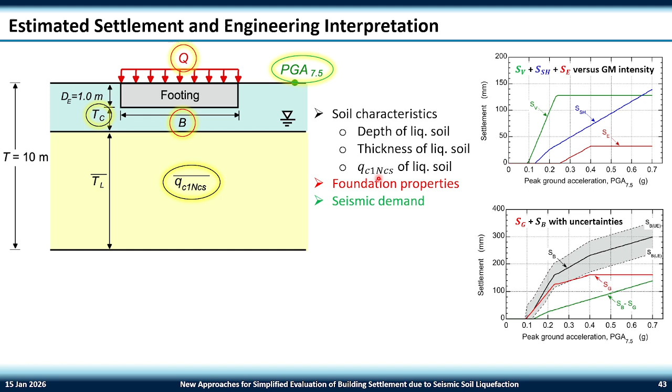So on the top, I'm showing you volumetric, shear-induced, and ejecta-related settlement as a function of PGA. And the beauty of this is you can see which of the three components contribute the most as PGA changes. At the low PGA values, you can see that volumetric settlement, this is just for one example on one site, but it does illustrate that here we're finding the volumetric tends to govern the response, whereas in this end, maybe it's the volumetric and the shear-induced that tends to both govern the response.

We can combine them to then get the total building settlement, and so you can see here the building settlement with uncertainty bounds as well, or just the ground settlement. And you can see the difference between the red and the black line is that additional shear-induced component. And you can see it starts playing a role in these larger PGA values for this site. Now compare that to the traditional standard of practice I covered at the start, where you would just perform a volumetric calculation at two values, so you would get this point here and this point here. And so you see the power of evaluating this type of holistic approach so then you can understand what the key governing features are of the response.

Remember, SV does not discriminate between shallow and deep liquefaction, and so using that as a proxy for building liquefaction is a problem. While we know shallow liquefaction is increasing ejecta-related and shear-induced settlement in our method, it's important to include engineering interpretation as well. What is this method not capturing? Well, perhaps there's significant distress and ground surface irregularities. Perhaps there's potential for cracks and fissures and instability as well on the crust, and that can contribute to ejecta manifestation or no manifestation, and that's not inherently considered. So that's an additional interpretation from the engineer that's required. Maybe differential settlements are of concern, and how you want to convert that to differential settlements is also an additional interpretation as well. And so it's important to just also step back and think, what are some features that are not being captured, and including those in our considerations.

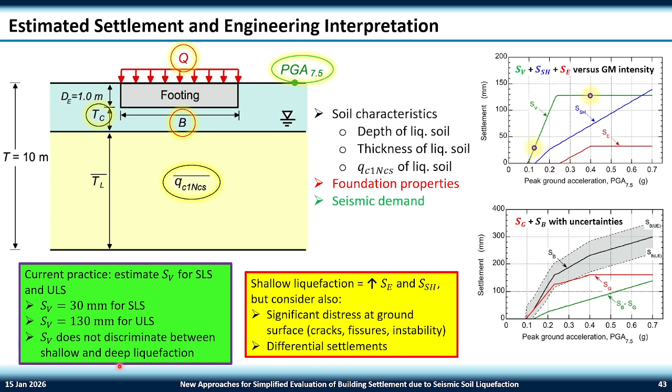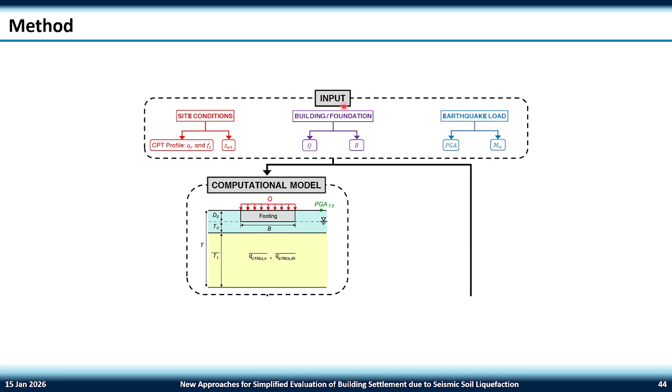This is just a quick flow chart just to round it off. So recall the three input parameters, site conditions, building, and earthquake load, define our computational model. From there, we can then calculate our three components of settlement: volumetric, shear, and ejecta. And then we can get ground and building settlements, so combining volumetric and ejecta to get ground settlements, adding shear-induced to get building settlements, and then considerations of uncertainties, plotting them as a function of PGA.

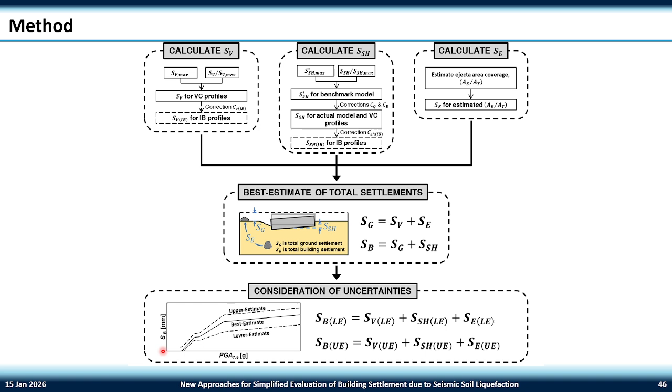Now, while the method is summarized in those papers, there is a spreadsheet tool that is available on DesignSafe. So it is free to download. You can go on there. You can see it's already been used quite a few times. But that has links to the three papers, so you can then go and read the papers if you want. Pay attention to the version number, given that this is research work that is still ongoing. There could be a future version. And you'll find that there's two spreadsheet links at the very bottom for you to download.

Okay. The first spreadsheet is called the two-layer model, and it's a very simple concept. You're converting your CPT to the equivalent two-layer computational model. Okay, so this is just a snapshot, a peek inside the spreadsheet, but you would input some CPT values.

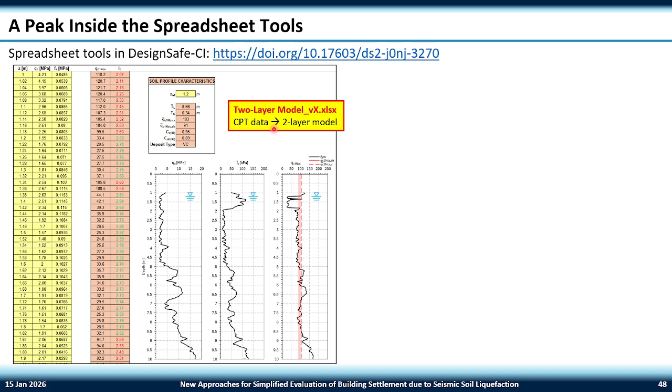There's some parameters that you can play with, and essentially it gives you our computational model. I don't know if it's very obvious, but you can see here TC, the thickness of the crust, is 0.3 meters. There's our QC1NCS values, etc. There's our deposit type, vertically continuous. So that first spreadsheet gives you the two-layer computational model parameters.

The second spreadsheet allows you to perform the settlement calculations. And so you can see here, one set of inputs is the earthquake load, that's PGA and magnitude. Then we have our foundation properties, our width and our bearing pressure, and then our soil profile characteristics as well. And you'll notice these are the same as from the first spreadsheet, so you can copy them over for that given CPT if you want.

And you get quick outputs like this, so you get the volumetric, shear-induced, and ejecta-related settlements with uncertainties. You can see in terms of the bar chart which is contributing the most for your PGA, where that settlement estimate sits in relation to the overall response as a function of PGA. So these are outputs that you get straight away.

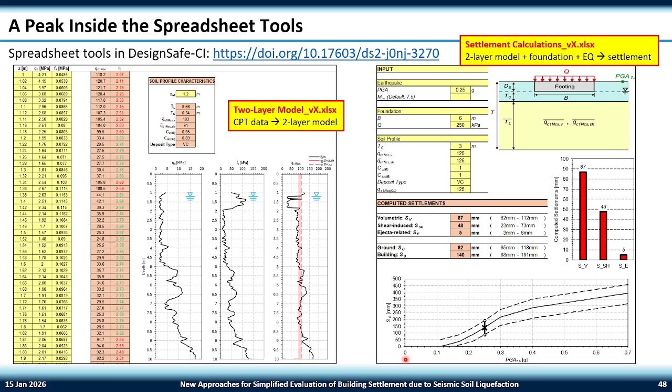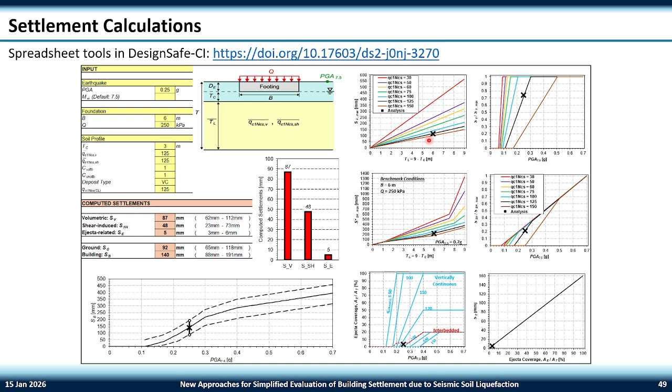If we dive in, there's other plots as well, so you can see where your site sits in those charts that I showed earlier. So this is the maximum volumetric settlement versus thickness of liquefied soil, one of the many charts that I showed, and you can see where your site sits relative to the overall plot. And again, quickly visually look at sensitivity of key parameters. And there's plenty of other sheets and charts as well. I won't go into the details, but this is just a peek inside what is available.

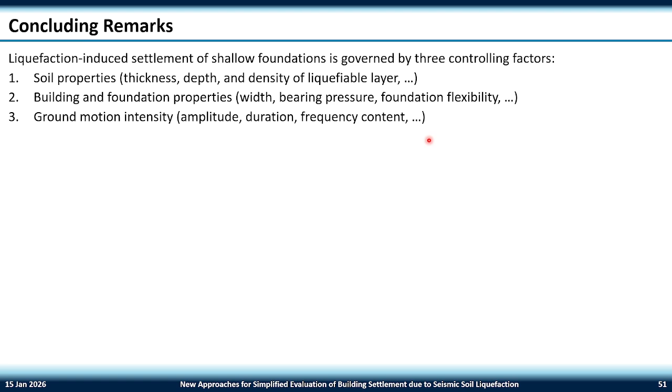Okay. Well, thanks for sticking with me on this. So just to conclude, liquefaction-induced settlement of shallow foundations: three controlling factors in line with the simplified procedure. So we're looking at preliminary design, soil properties, so thickness, depth, density of liquefiable layer, building and foundation properties, width, bearing pressure. A component we didn't consider is flexibility of foundation, irregularity of these properties, etc. And then ground motion intensity, amplitude, duration, frequency content. To be consistent with the simplified framework, we're using PGA and magnitude, but it's important to recognize these other features may play a role as well.

The Cubrinovski-Dhakal method that I covered places a great focus on integration of the three settlement components into a single framework, so you're no longer working between frameworks. Holistic consideration across the range of PGAs before you bring in SLS or ULS cases. So you're looking at the response before you even look at the NBC, for example. It allows for quick and easy evaluation of sensitivity of settlements to key parameters, and allows for engineering scrutiny and interpretation, for example, inclusion of uncertainties as well.

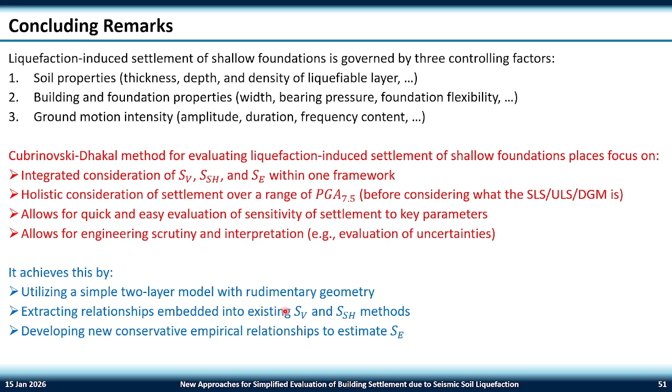The key reasons: one is it's utilizing a simple two-layer model with rudimentary geometry, so we can, as engineers, quickly visualize and understand the effects of key parameters, extract relationships embedded into existing methods, and then develop a new conservative empirical procedure for ejecta-related settlement.

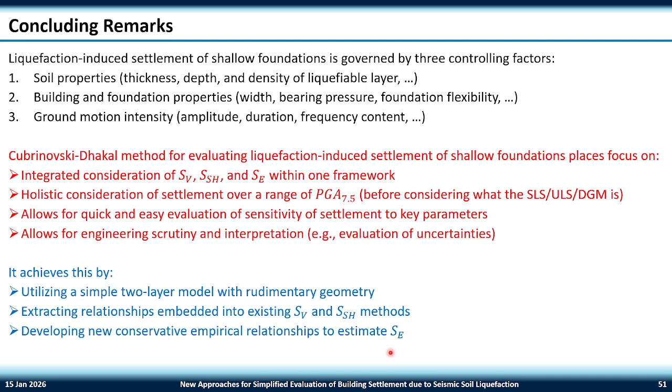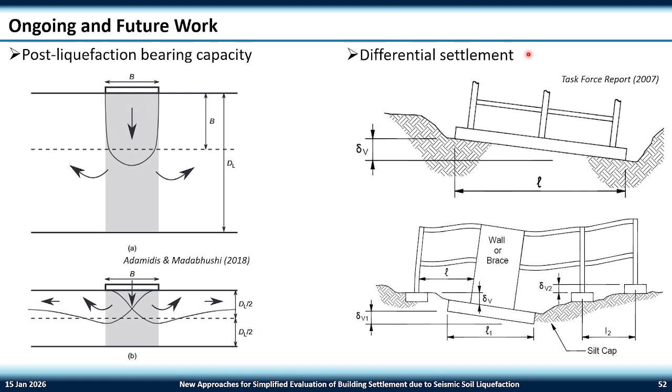Some ongoing work that will be part of my research here at UBC is supplementing this with looking at post-liquefaction bearing capacity. And a lot of centrifuge data has suggested there's a key difference in the response of cases like this where we have this punching mode of failure versus a more general mode of failure, and so looking at those effects and then translating that to differential settlements as well, getting a good idea for what really is affecting differential settlement is some ongoing work that I'm looking at.